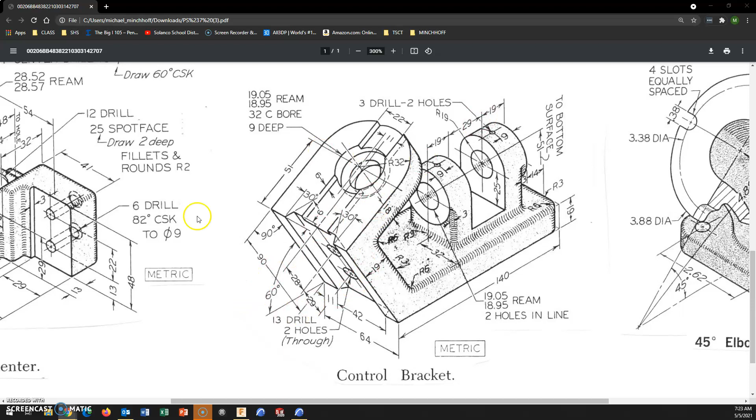But let's take a look at this one. So we have to end up getting these small little holes, which we will hopefully add some sort of plane and then sketch on this plane and then cut down. This one is in millimeters as well. Most of your dimensional information is here in the front view.

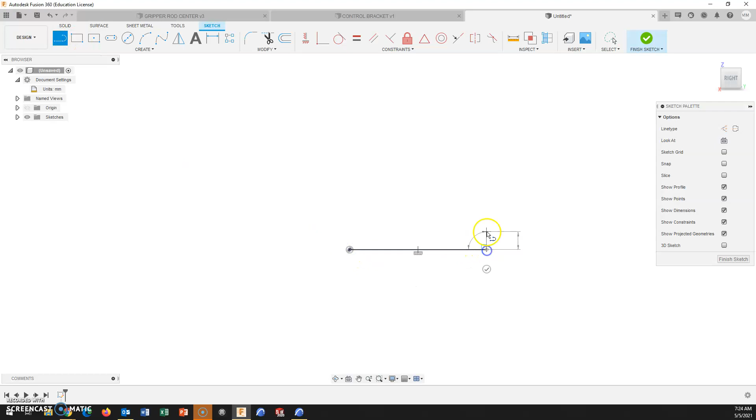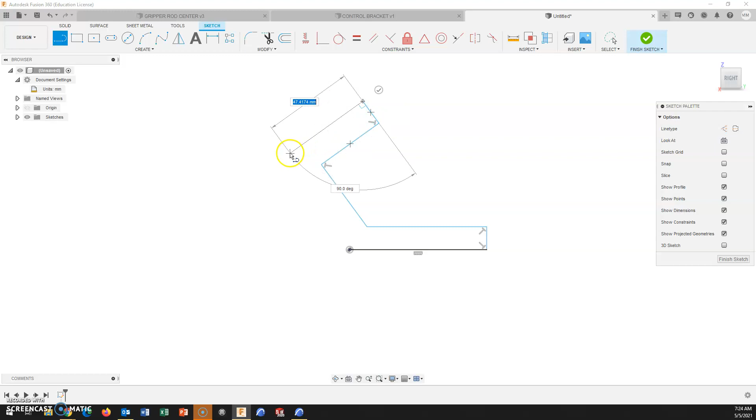Up and over, my 60-degree angle, and this one's perpendicular. You should get a perpendicular reference. You can create a perpendicular constraint, or you can measure this out at 90 degrees. But perpendicular snaps pretty readily. Finish this off here. Trim these off. Make a nicer intersection.

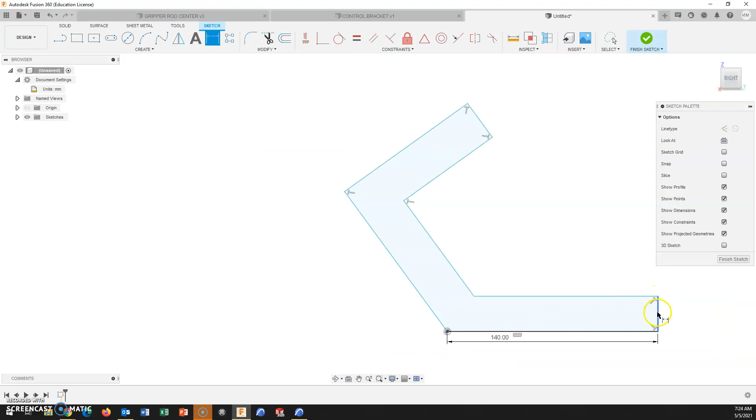In terms of adding some dimensions, we have an overall length across the bottom of 140 millimeters. A base material thickness of 19. That 60-degree angle. This is a true length measurement at 90, and then 51 to the center of what will be that cylindrical end.

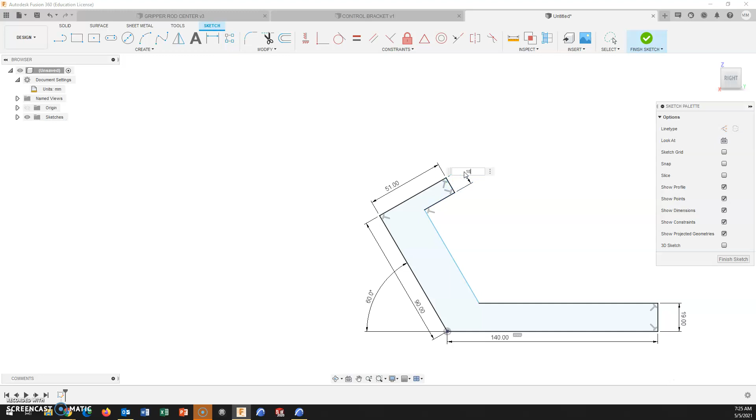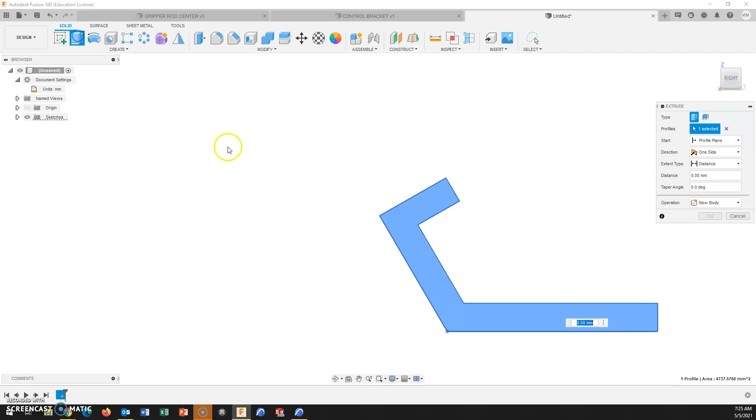This section is a width of 18 millimeters, and this section is a width that is parallel, 19. If you get an angle measurement here instead of a distance measurement, they are not parallel. You can add a parallel constraint. By extruding symmetrically, you will then have a reference plane later on without having to add a midplane if you opt to do so.

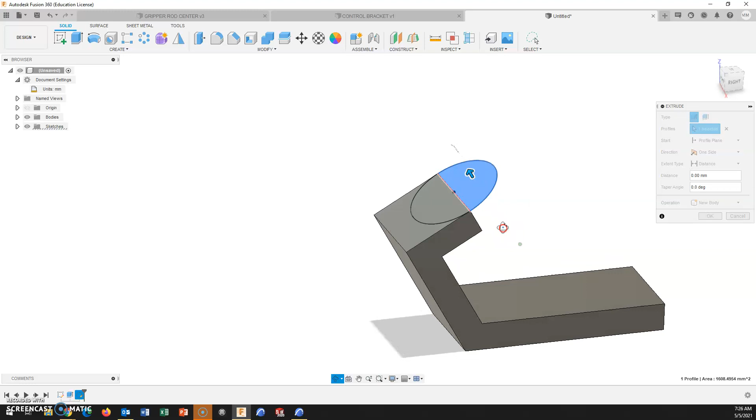I'm going to come right to work here on the top. I cannot cut and extrude at the same time. So I'm going to opt to create the material so I can then cut away from it. I'm going to start by cutting out this rectangular section. And we have a width of 22 millimeters, and that is 6 millimeters deep.

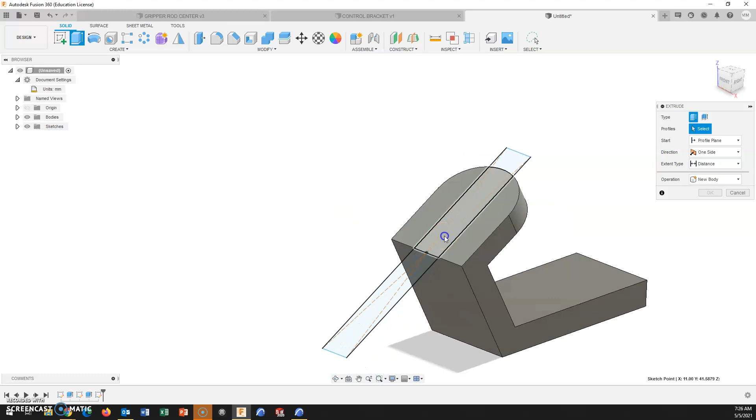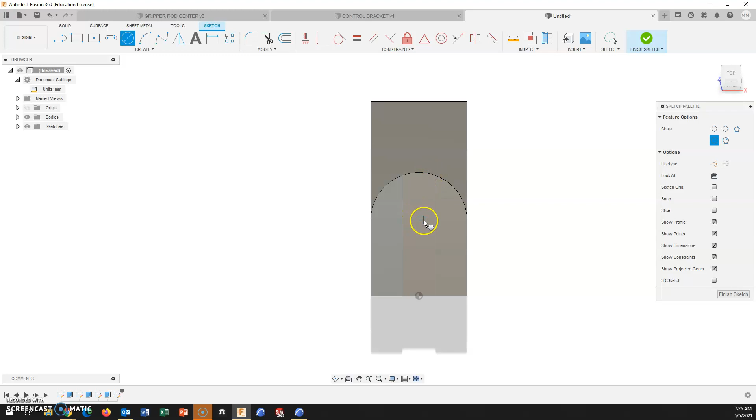By referencing this face here, I have a counterbore cut of 32 that is 9 millimeters deep from the top. Sorry, this surface. 9 millimeters from this surface down. I'm going to sketch a circle. It is 32 at 9 millimeters deep.

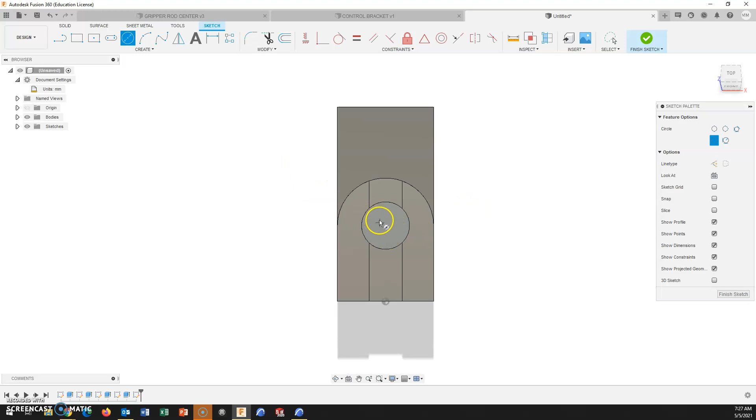Minus 9. And then I have a drill hole diameter that is a tolerance of 18.95 to 19.05. Whole number 19 works out well. It is within tolerance. Less keystrokes. This grooved angle cut. You can mirror this sketch. It is symmetrical.

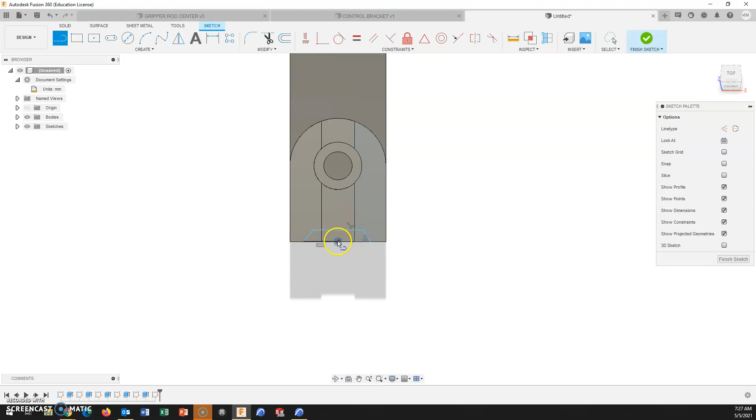A couple extra dimensions I don't think is going to hurt. So it is 42, so 21 and 21, because this is to a midpoint. It is not to the midpoint. So 21 and 21 is 42, which should give me 11. Correct. This groove is 6 millimeters deep, and the angle is 30. 30. We will cut this all the way through.

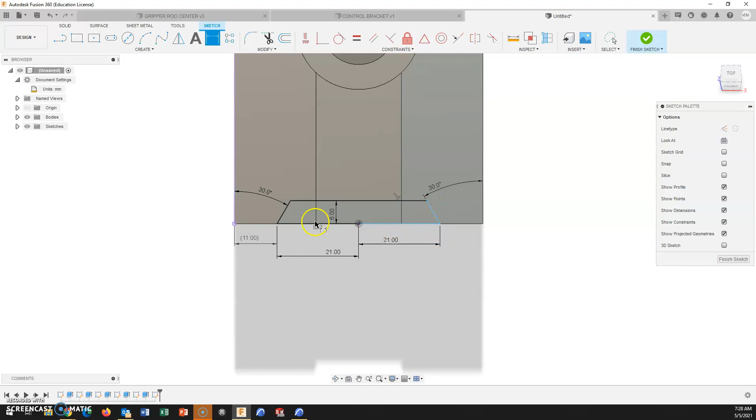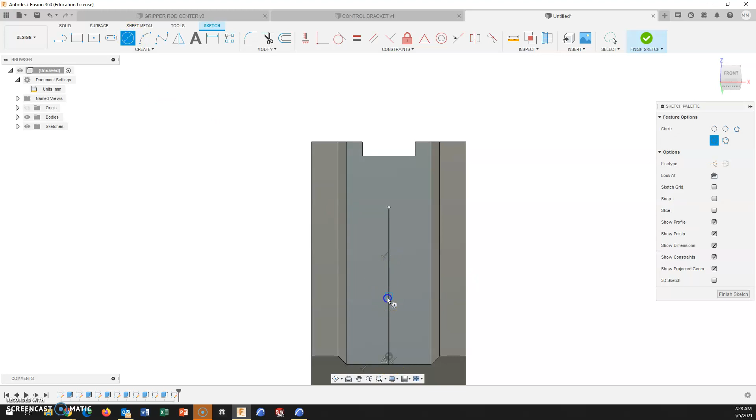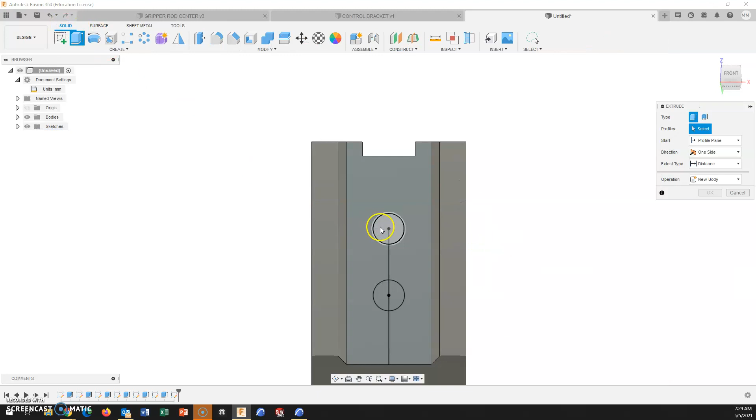I have 2 drilled holes. It is centered by using the midpoint, and now I can create my circles, which both of them are equal size, and the diameter is 13. Distance up from the bottom is 29. Distance from center to center is 28. These 2 holes will be cut.

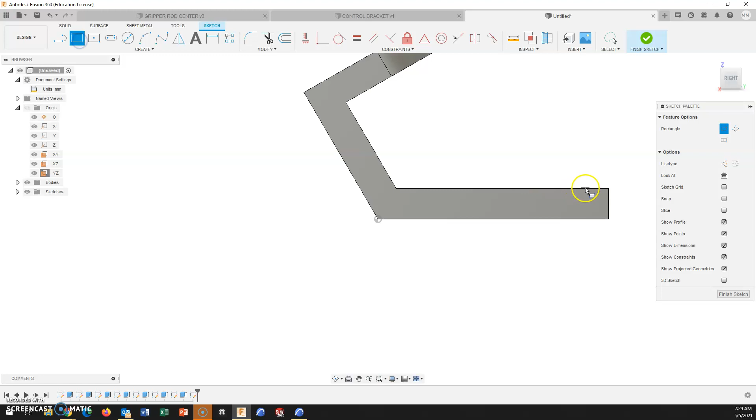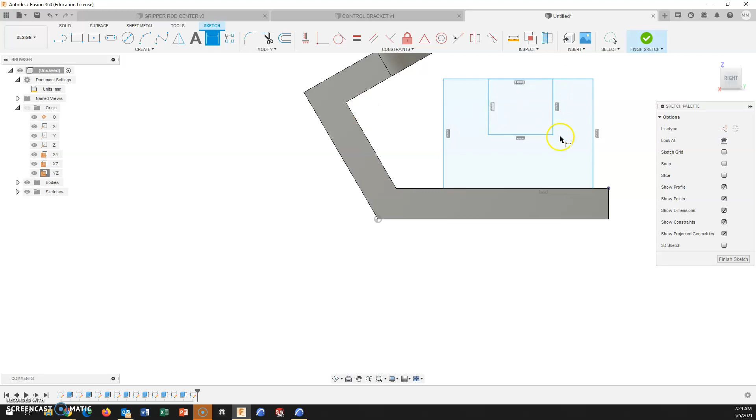Okay. Creating this section here on the back side, since I already have created a midplane, I'm going to reference that midplane. Start with a block of material. There's a groove that goes through the center, and I am then going to opt to cut in underneath, since that is a measurement that I do know. Set these, and now start adding my dimensions. So the distance from the bottom is 51 to the center of the circle.

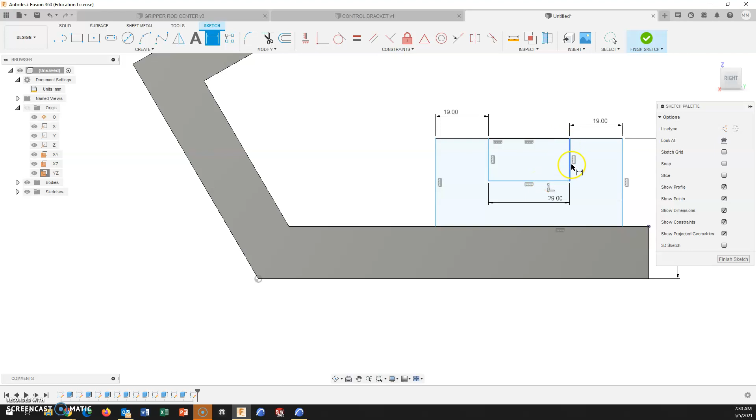19, not degrees. 19, 29, and 19. And we have a distance down from the center of 25. And we need a distance in from the end, which is 14. All black construction lines means this is constrained.

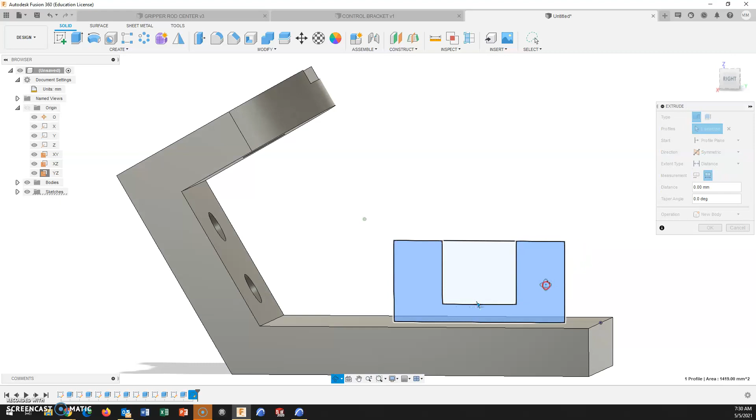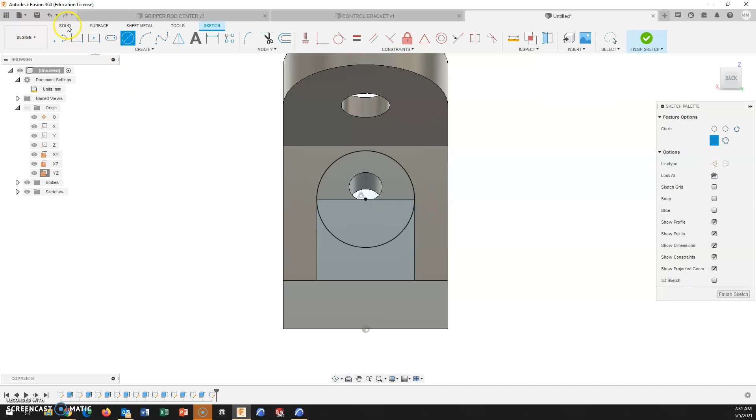I'm going to extrude symmetrically an overall width of 19 times 2. We could do 19. That's the radius that sets these cylinders on the top. We can mirror features, which is what I would opt to do. I am going to extrude in one direction.

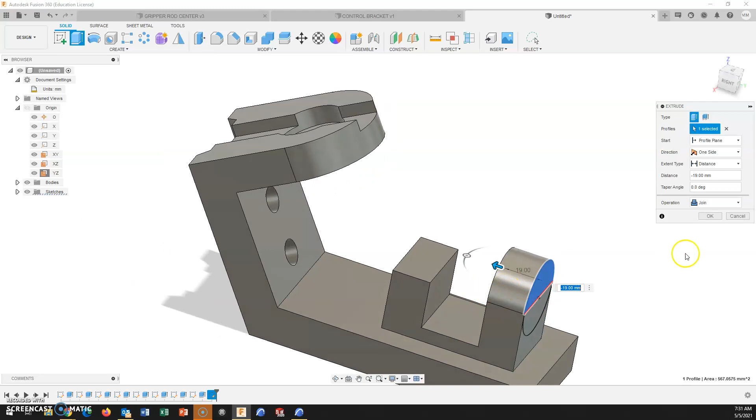No, I have to cut underneath. I set this up to cut underneath. I'm going to do all the work on one side and then mirror those features to the other side. I'm going to cut underneath. I've made a contour. I'm going to cut this in 3. I'll cut my hole, which is a 16, is within tolerance.

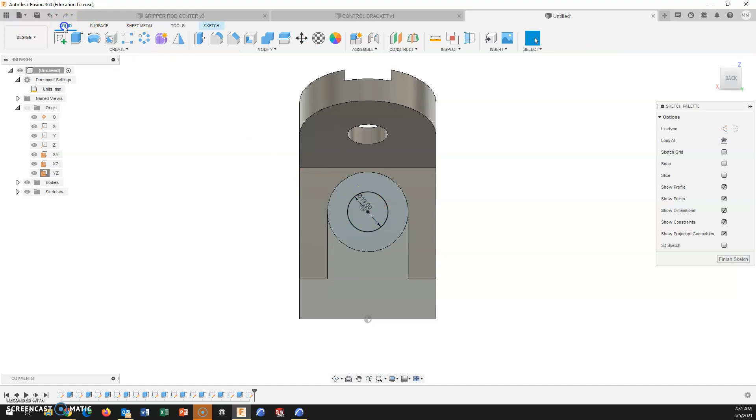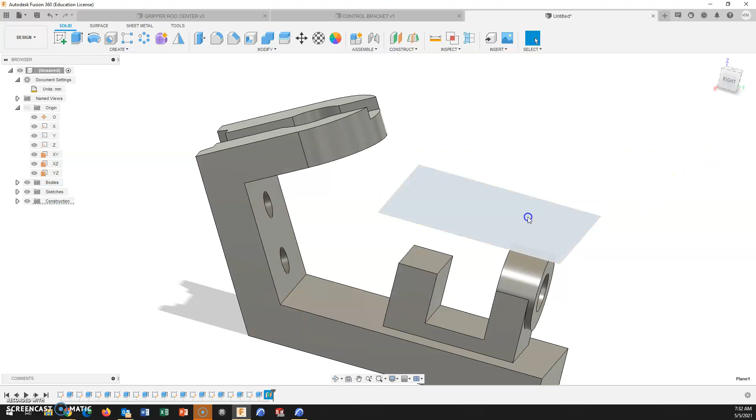I'm going to create the hole on the top. So by selecting this face, I can add an offset plane. I'm just going to bring it just above, like out of the screen above. And I am going to draw a hole in here that is centered. This hole is a diameter of 3. And the distance in from this back edge is 9 millimeters.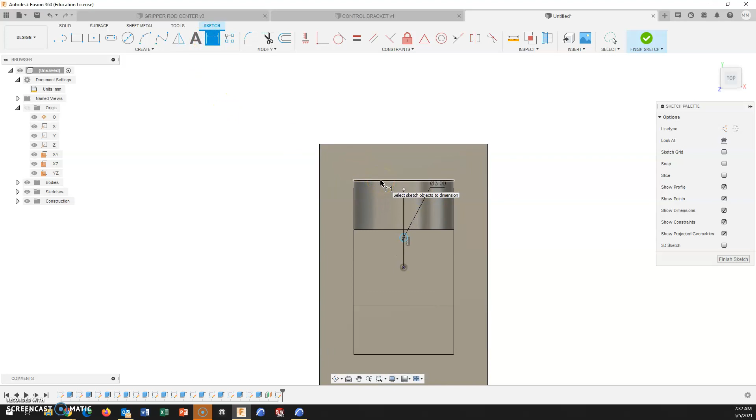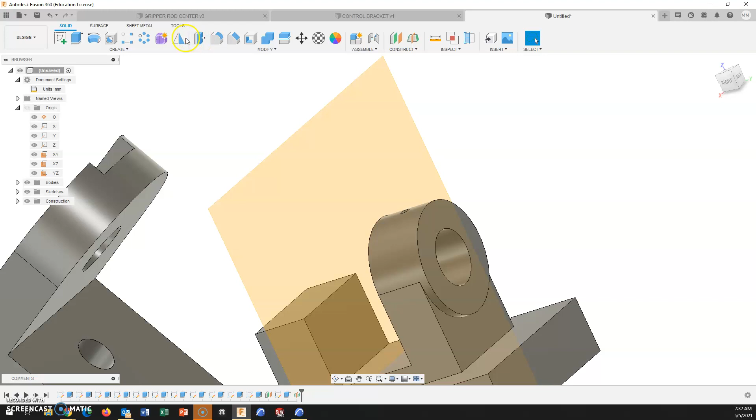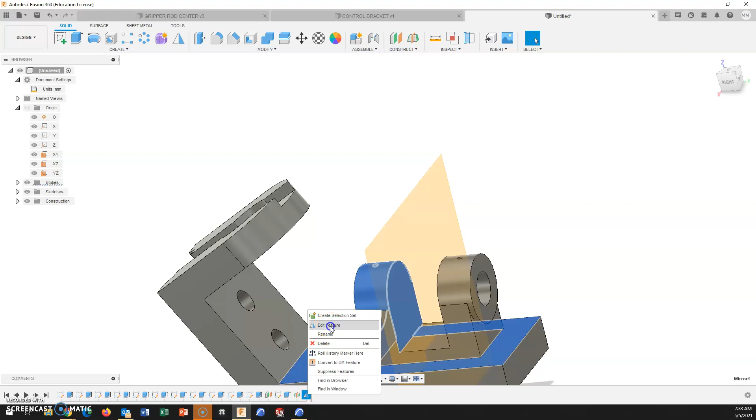When I go to cut this, I want to cut it just so it goes through the top. That will work. Now I can add a midplane, and I can mirror multiple features off of this midplane. So I have the cylinder, I have the drilled hole, I have the undercut, and all of that is going to get mirrored to the other side. Oops, forgot the hole. Let's edit the feature. Should have done them all at once. Done with the plane.

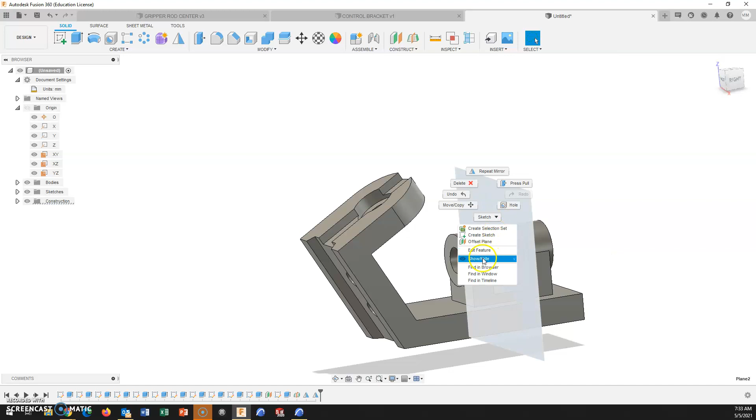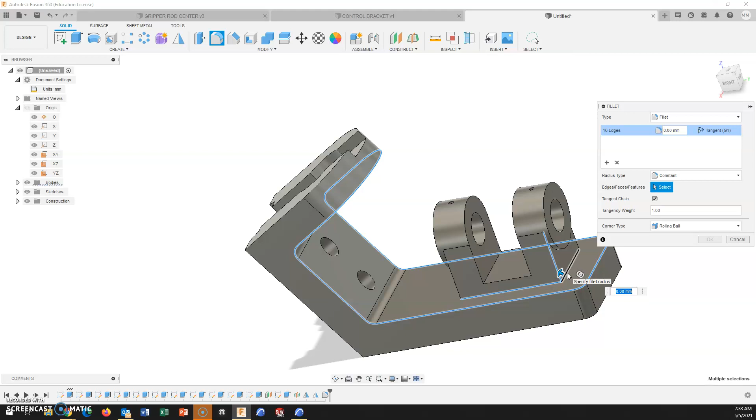Fillets. I would put your structural fillets on first. The radius is 6. And then your casting fillets. Run all the way around. Up under the cylinder. And around the base. These are all radius of 3.